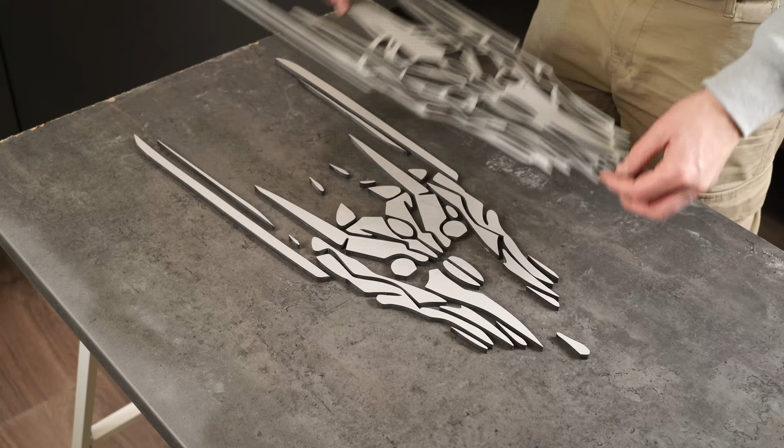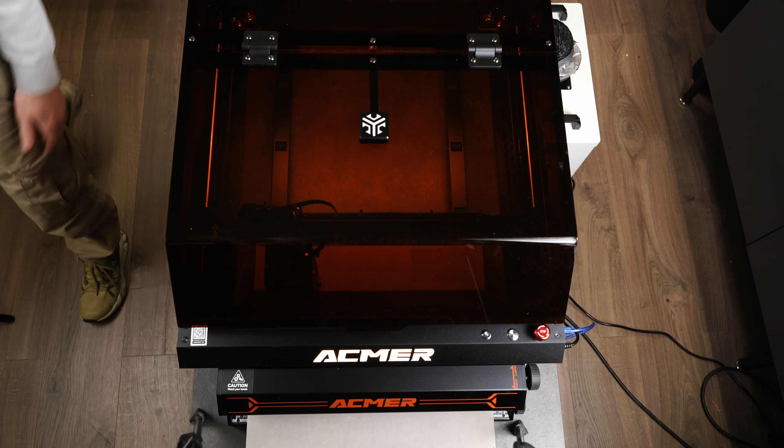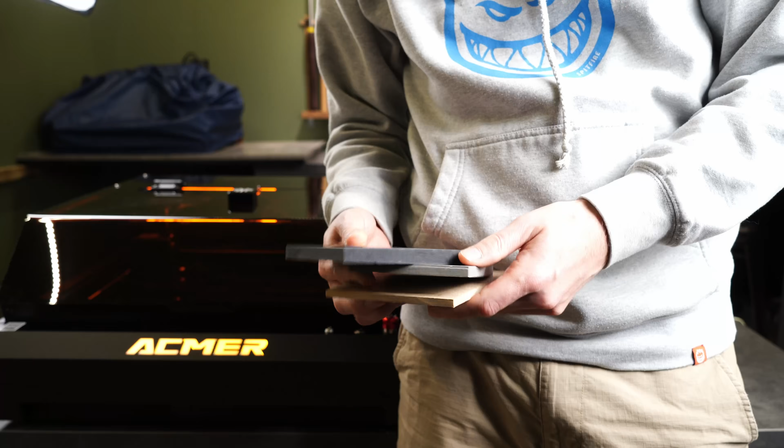Today I'm solving a problem I've had with laser cutters for a long time: making large designs without splitting them into tiles. This piece is 70 centimeters long and was cut on a desktop laser. Normally that would not be possible, but this Acmer P3 supports a conveyor system that lets the machine engrave and even cut pieces up to 4 meters long. So today I'm going to see how that actually works. I'll walk through the setup of both the machine and the conveyor, test the cutting power, and then try to

cut a large design that would normally be far beyond the limits of a machine this size. This thing comes in a huge, heavy box, and I like that. The weight usually means a sturdy build, and the size often means the machine comes mostly assembled. And that's exactly the case here.

The machine is packed fully assembled, with only a few small steps needed to remove the safety locks that protect vulnerable parts during shipping. There's a printed settings guide for engraving and cutting different materials. And here is the machine itself. It's quite large, but what you'd expect from a machine with a 40 by 40 centimeter work area, even without the conveyor.

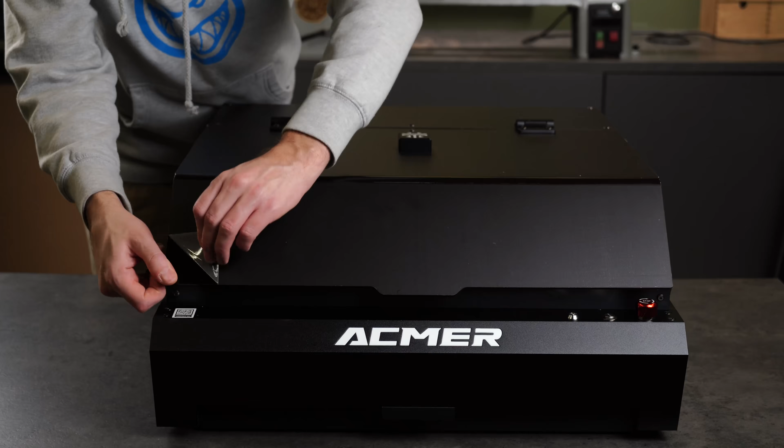There's a protective film on all the panels, and like on many other machines, you actually need to remove some brackets and screws to peel it off cleanly. Luckily, I have some help.

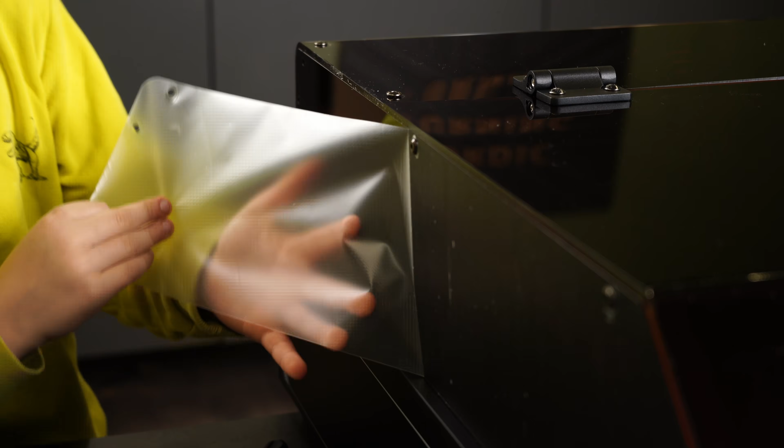I promised my son I would make him a really cool design we found on Etsy using this machine, so he's eager to speed up the process.

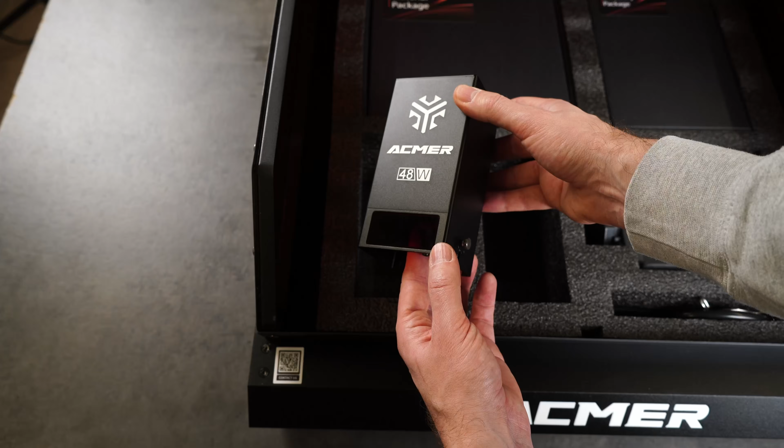Inside the enclosure, you'll find some tools, safety glasses, and the 48-watt diode laser unit. This is the most powerful diode laser I've used so far, and it should make cutting most materials pretty fast. The machine also comes with a powerful air assist system, which is essential for a cutting machine like this. You get a material pack, which is good for testing, and of course the power cable and the USB cable.

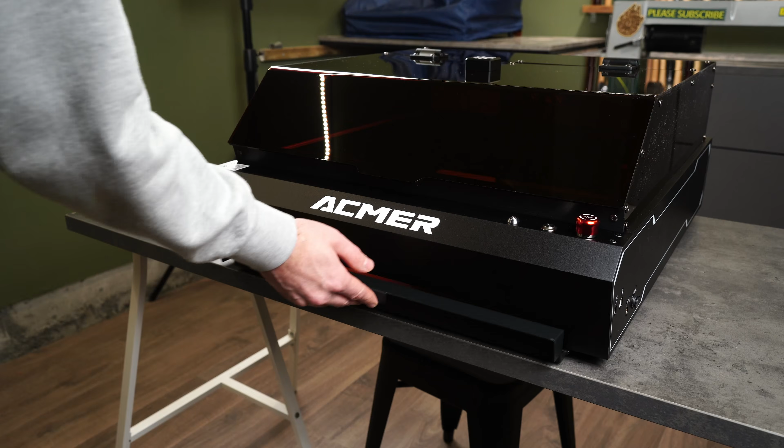The machine has a loading tray with a built-in honeycomb bed. That's really nice, because the alignment guides on the honeycomb frame are always perfectly positioned that way. I'm just removing the safety locks that protected the moving parts during shipping, and then we're ready to connect everything.

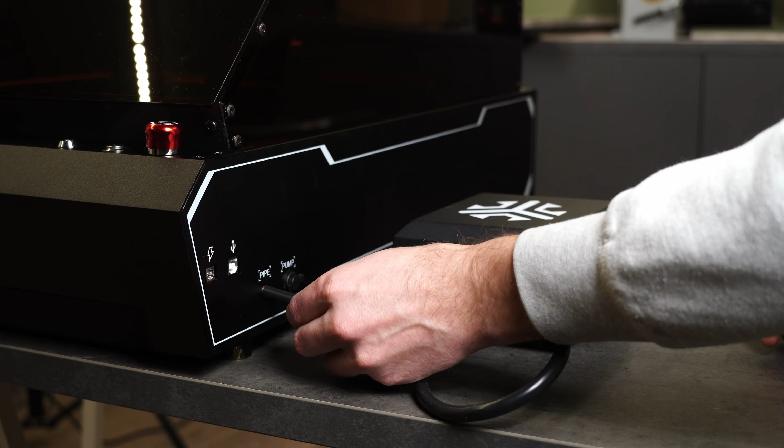I like the tidy setup of the air assist, with the tubing already installed and the pump powered directly from the machine. Installing the laser head is quick, as it should be, especially since you can swap it for other modules like the 24-watt engraving head or the infrared module.

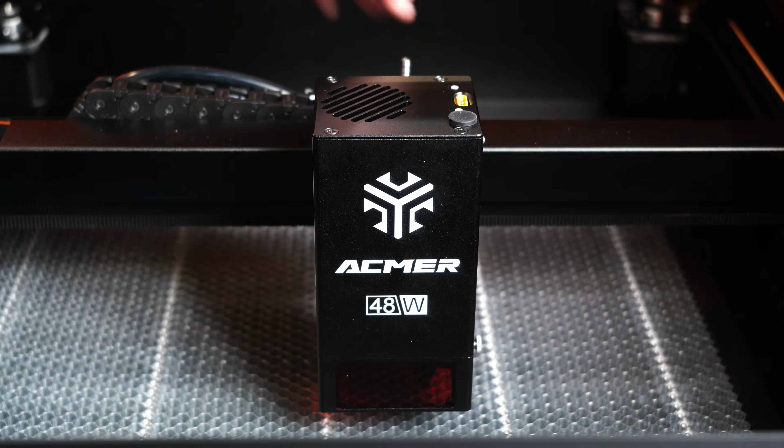And now that the machine is ready to go, I do like the look of it. It fits comfortably on my 60 centimeter workbench, and the clean black design should look good in most workshops.

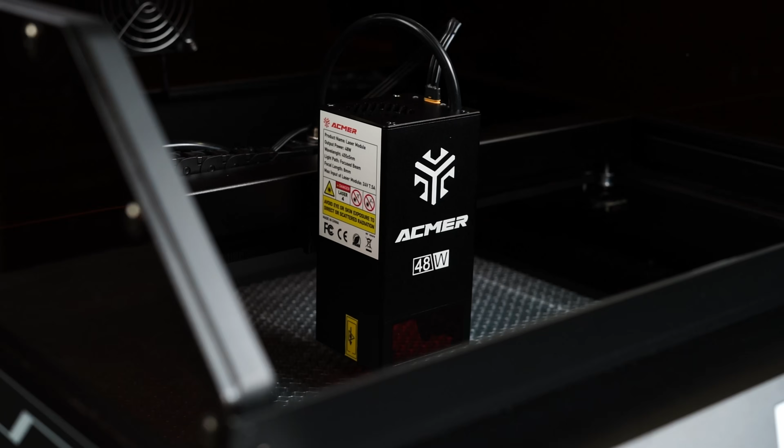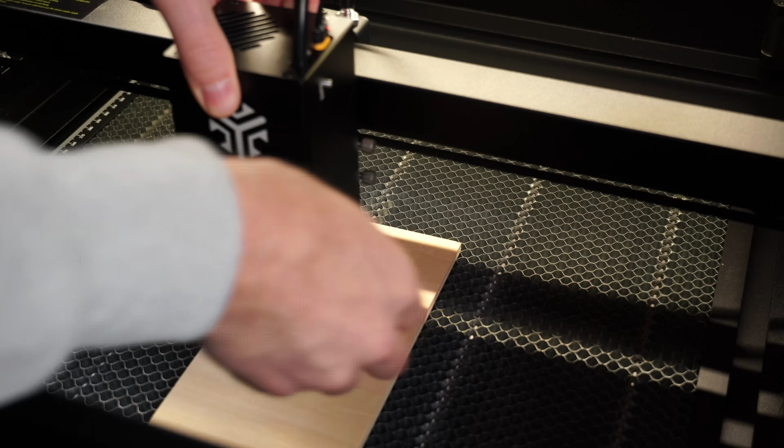Now, let's get straight into testing. I'm starting with both engraving and cutting 6mm basswood using the recommended settings from the guide. The laser unit has a protective visor, and combined with the dark tint of the enclosure, I might not be able to show the engraving process very clearly, but at least I know I'm well protected from the laser beam.

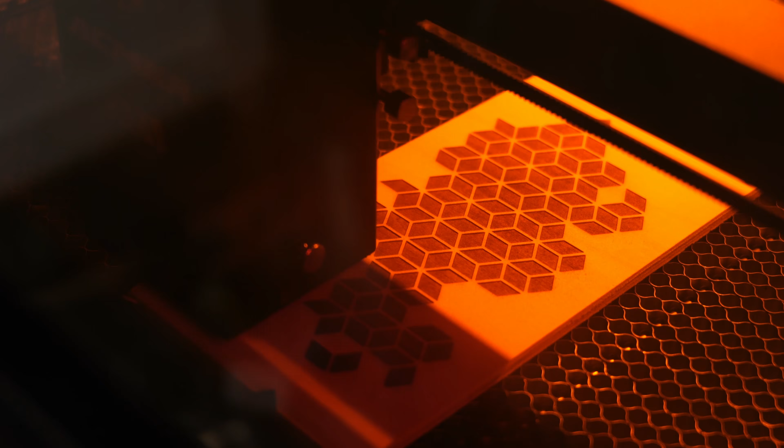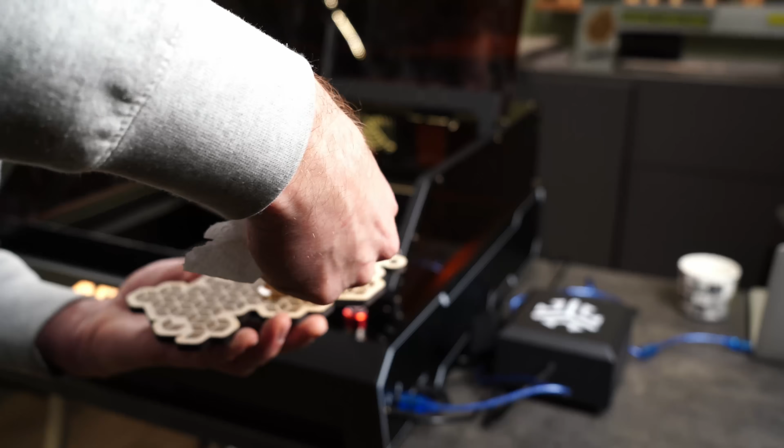The engraving looks deep and clean, although it would be faster if I had used a raster image instead of vectors. With vectors, the laser fills every individual shape, instead of filling large areas in passes. The cutting, however, is really fast. 600 mm per minute cuts through this material without any problem, and I could probably increase the speed even further. For the large project later, I'm doing a more demanding cut, so we'll take a closer look at that then.

Next, I want to take a look at the Acmer design software. This software can control all Acmer lasers and also lets you design your projects for free right in the control app. The interface looks really clean and should be intuitive for beginners, and anyone used to LightBurn or other laser software will have no problem navigating it.

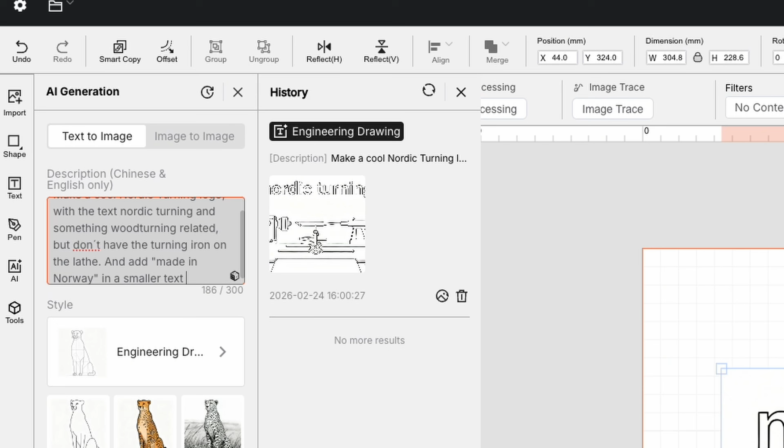The feature I'm most curious about is their intelligent design tool. Let's try the text-to-image generator and see what happens. My prompt was, make a cool logo with the text NordicTurning and something wood-turning related. Well, it looks pretty cool, but having the chisel mounted between the headstock and the tailstock is probably not the best idea. After a few adjustments to the prompt though, I get something I'm pretty happy with.

I enjoy making my own designs and spend a lot of time doing that, so I'm probably not gonna stop designing from scratch. But for certain jobs, this tool could definitely save some time. And for someone with no experience using vector design software, this could be their ticket into creating their own unique designs. Let's engrave it and see how it turns out.

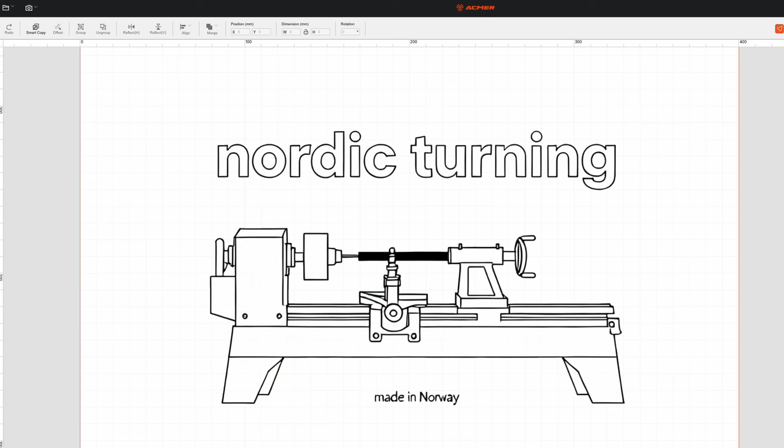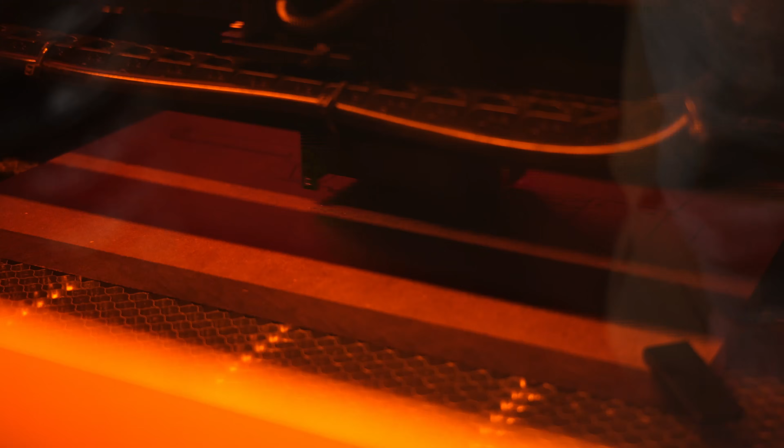I'm taking this opportunity to test a new material, colored MDF. I've used it for a few projects recently, and I really like the look of it. It requires very little finishing to get great results. While engraving, the mark looks almost as dark as the surface and hard to see, but just wait till I apply some oil to it.

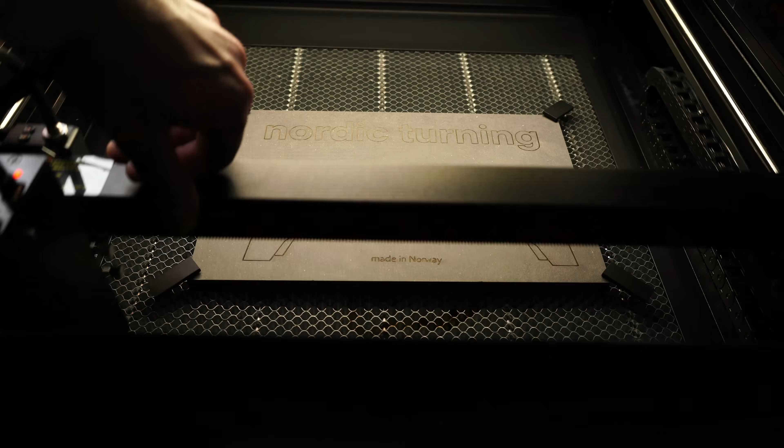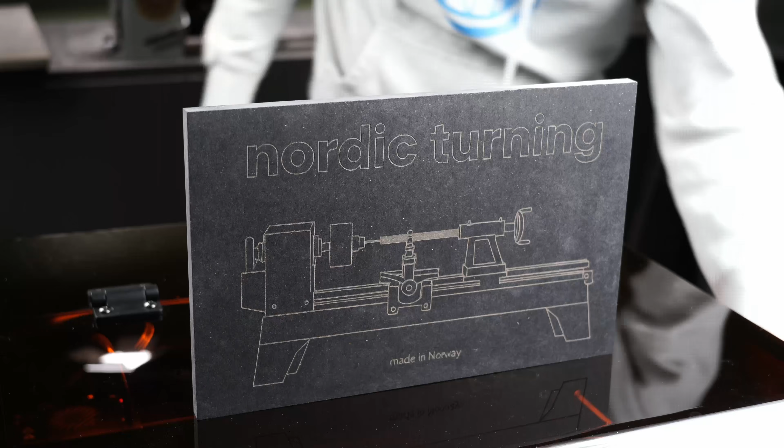The engraving is crisp, and the app-generated design works. Time for the transformation. Just applying a little oil gives this really unique look and a great contrast. I'll definitely be experimenting more with this material.

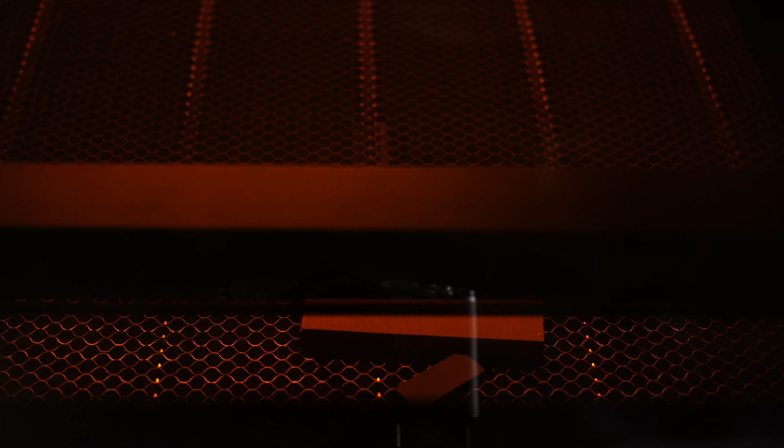Now, let's start preparing for the large design using the conveyor. The design will be cut from 8mm colored MDF, and before setting up the conveyor, I want to test the cut settings. I could run a full grid test with power and speed combinations, but I already have a pretty good idea of what should work. So I'm testing 3 circles at 100% power with speeds from 600 down to 300 mm per minute.

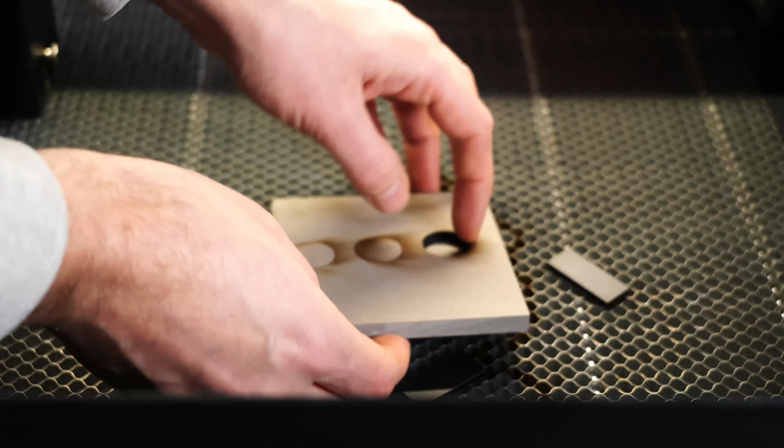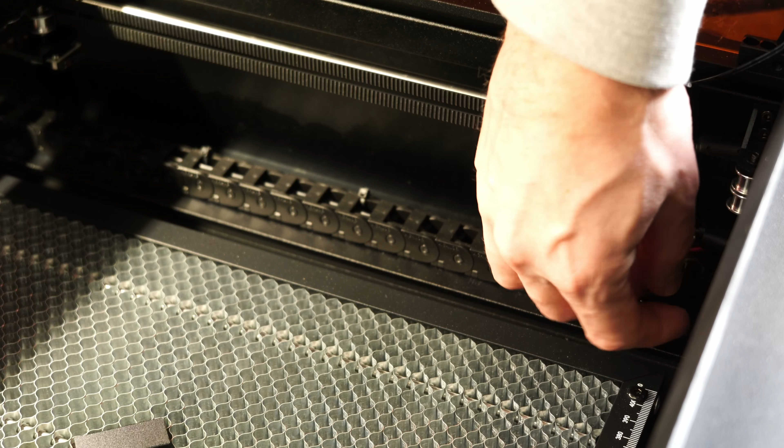Whoa, something is wrong here. That's a lot more soot than I expected. It cuts cleanly at 300 mm per minute and almost at 450, but the soot level isn't what I expected. After taking a closer look, I noticed the air assist tube had a sharp bend inside the enclosure.

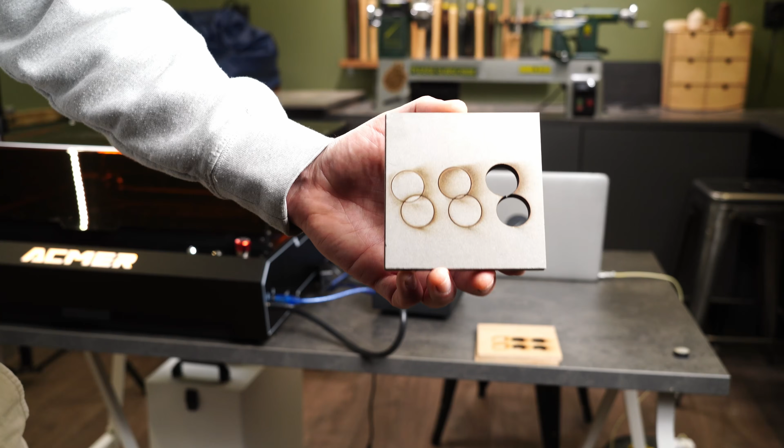Let's fix that and try again. That's a big difference. Before starting the real project, I'll check the rest of the tubing to make sure there's no other bends restricting the airflow.

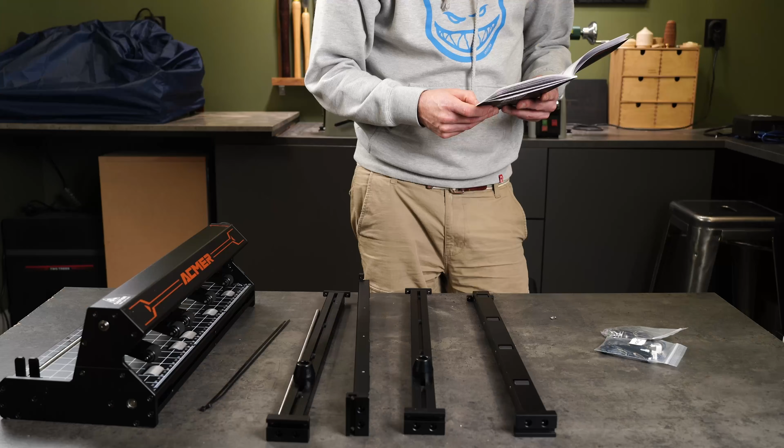Now let's set up the conveyor. I'm using the basic version, which is about 120 centimeters long, but you can get longer extensions. With those installed, it can support pieces up to 4 meters long. I won't go quite that big today, but my design will still be about 70 centimeters long, far larger than most desktop lasers can normally handle.

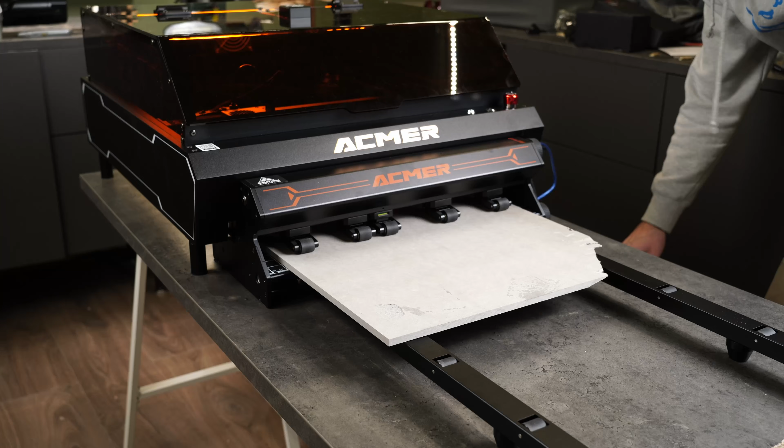The conveyor is actually a pretty simple concept. It has an active roller that grips the material. That roller replaces the machine's y-axis, so instead of the gantry moving back and forth, the material itself moves through the machine. That makes the y-axis virtually unlimited. The laser head now only moves along the x-axis, while the conveyor handles all the y-axis movement.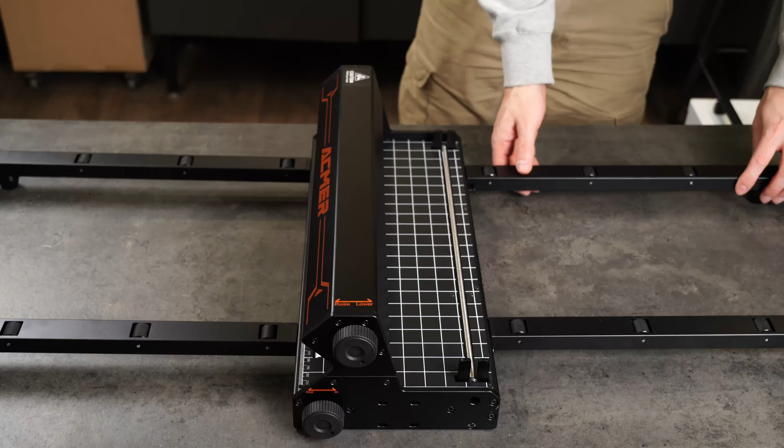The extension rails are simply passive rollers that support the weight of the material. And this is where alignment becomes very important. You need to make sure that all the rails line up perfectly with the conveyor. I'll show you why in a minute.

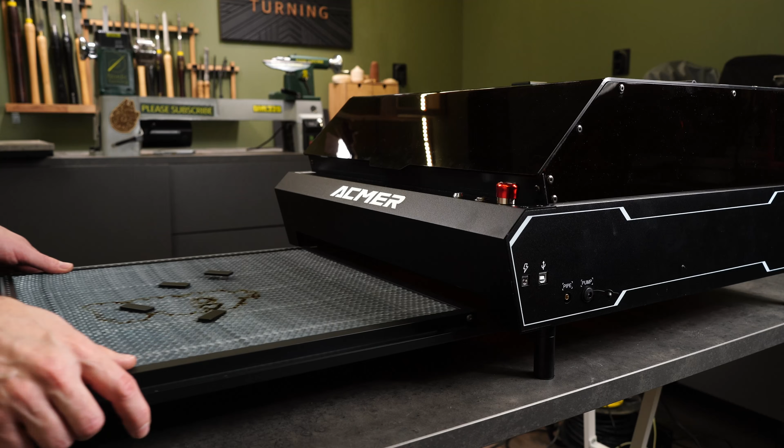Once assembled, you add the riser feet to the machine, remove the loading tray, and slide the conveyor into place. The conveyor will actually work with most GRBL-based lasers, but it's designed specifically for the P3, so it fits perfectly here. It connects directly to the rotary input, so you don't need to unplug the existing y-axis motors.

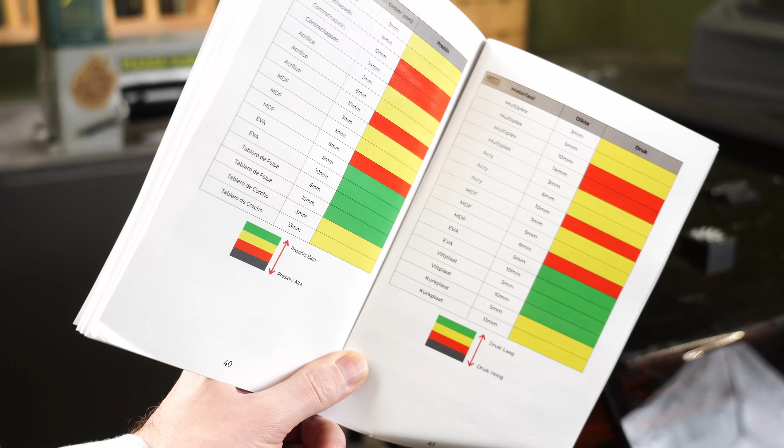Changing the GRBL settings and messing with the motor steps in the software seems complicated, so that part makes me slightly nervous. But the instructions are very clear, and I'll walk you through the setup step by step in Lightburn.

First, I create a machine profile with a normal 40 cm work area width and a 2 meter y-axis length. The length doesn't really matter, since you probably won't start jobs from the machine's 0 point when using a conveyor. Then I add a rotary device.

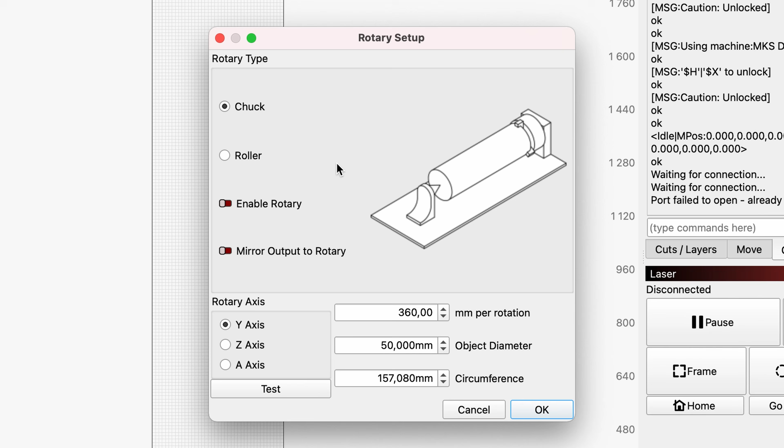There are only a few settings you actually need to change. Select roller, enable rotary, mirror output to rotary, and set the step per rotation value to 107. Now the machine knows how far to rotate the conveyor rollers to move the material exactly 1 mm. Press OK, change the start from to current position and the bottom left corner, and we're ready to go.

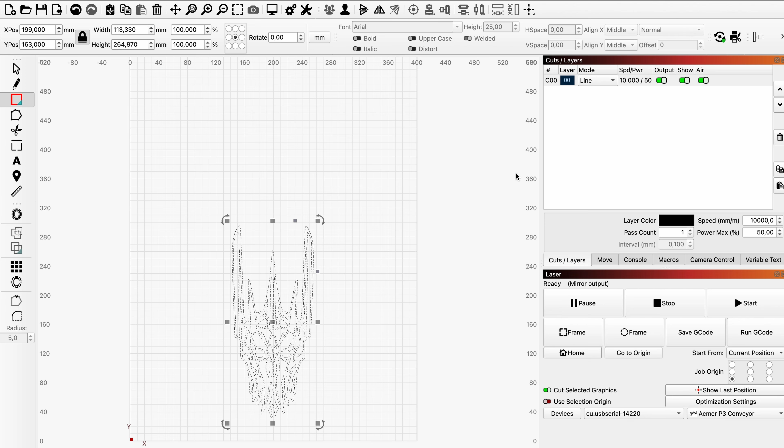Before running the job though, I want to test the alignment and see that everything looks good. So I run a fast pattern with lots of back and forth movement. And look at this, the material shifts more than a centimeter in just 10 passes. That means my alignment was sloppy.

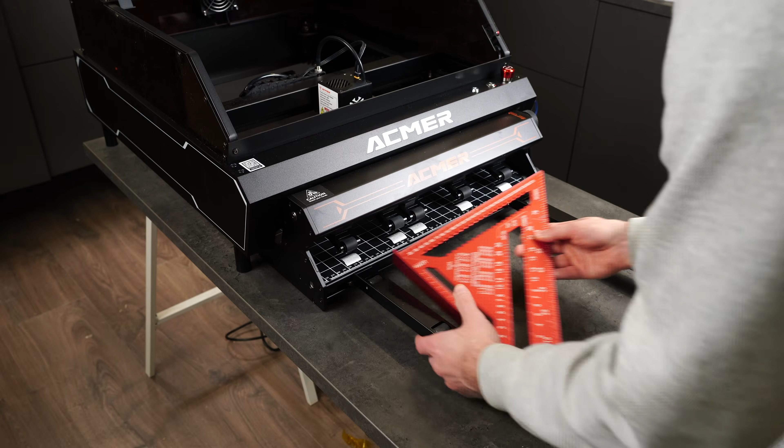The extension rails were slightly angled relative to the conveyor. After spending some time adjusting everything, it now moves perfectly back and forth without shifting. I was honestly surprised how big a difference the alignment made.

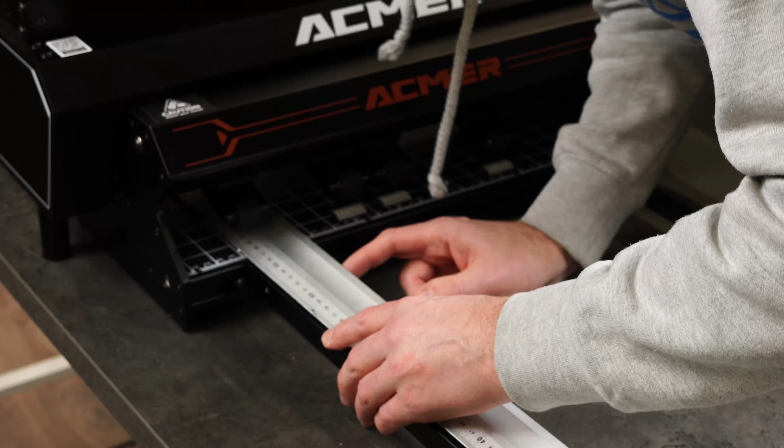If any of you have experience using conveyors like this, I'd love to hear your tips for getting perfect alignment every time. Now it's time to commit and run the full job. This is a detailed design, and even a small shift would ruin the whole piece.

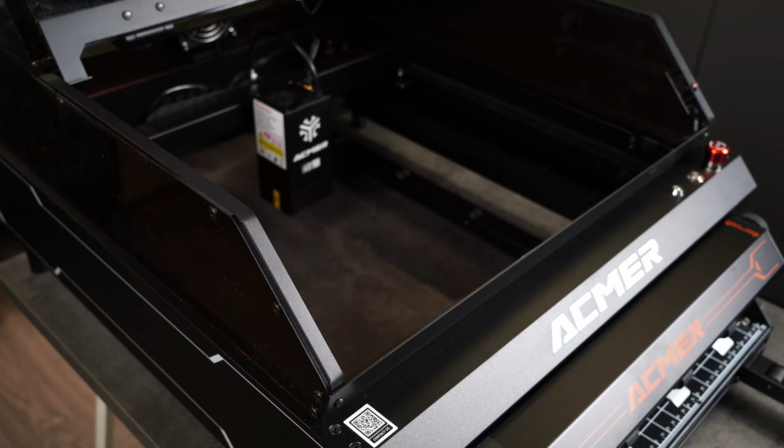2 quick tips before running a job like this. Because the laser moves back and forth on the x-axis, make sure you have something underneath that can safely absorb the laser energy without damaging your workbench. I'm using this corrugated, non-reflective metal strip for that purpose.

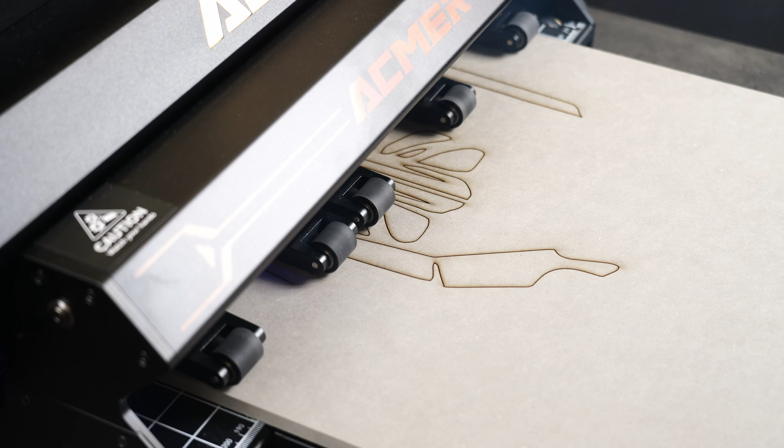And when cutting with a conveyor, you don't want to cut completely through the material. If the pieces fall out, they could pile up under the laser and cause problems. So I set the cut depth to about 99.9%. That leaves very thin connections that hold the design together until the job is finished. You can easily break those apart afterwards. I go for 350 mm per minute.

The job is looking really good, no shifting at all. Because the machine is raised on the riser feet though, my smoke extraction isn't quite keeping up. I might have to improve that later.

The cutting settings seem to work well. It cuts almost completely through, but the pieces stay in place exactly as planned. After about 30 minutes, the job is finished, and I can finally breathe a little easier. That would have been a lot of wasted material if it didn't work.

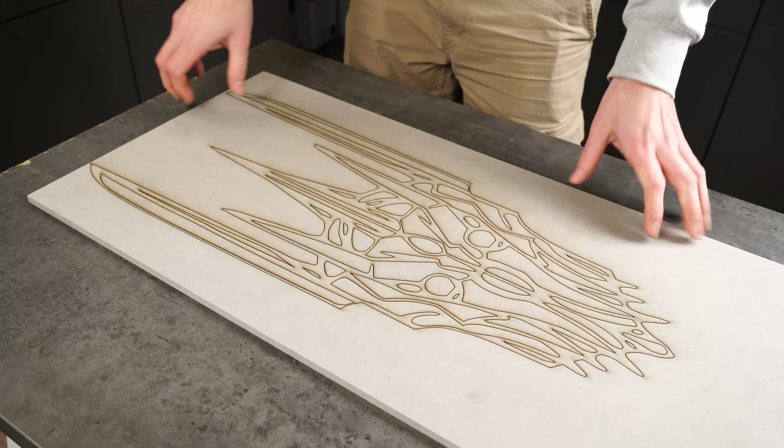Some areas still have about 1/10 of a millimeter holding them together, so I'll sand those off. While I'm at it, I'll also remove the little soot that's on the surface. I'm using 220 grit sandpaper, which leaves a really smooth, nice finish.

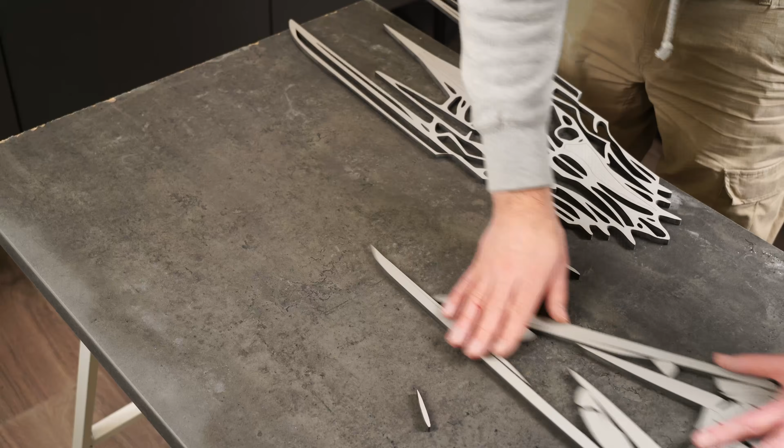And there it is, a large design cut on a relatively small workshop laser. And seeing how well the P3 cuts and how well the conveyor works, I'm definitely tempted to go even bigger next time. But that's it for this video. Thank you for watching.